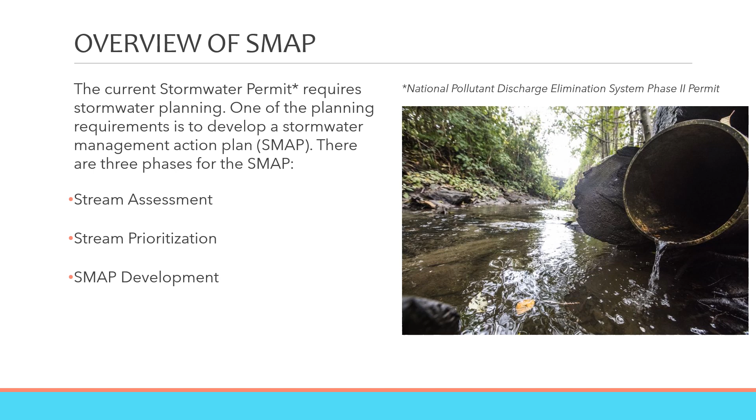3 steps are required to complete an SMAP: a citywide stream assessment, a stream prioritization, and development of a plan for the prioritized stream. With your help, we have selected Miller Creek for Burien's SMAP with a focus on the downtown subbasin. We have developed stormwater solutions that can improve the water quality in Miller Creek, which we will go over in this video. More information on this project can be found on the city's website.

The Burien Stream Assessment was completed in March 2022. 3 watersheds were brought to the public for prioritization: Miller Creek, Walker Creek, and Salmon Creek. Miller Creek was prioritized in June 2022, and stormwater solutions were developed and ranked by the public in August 2022. At this point, we have developed the stormwater solutions and are bringing them to you for review. We will incorporate your feedback into the final SMAP, which will be completed by March of this year.

Why did we choose to focus on our downtown? This subbasin is very urbanized, so it has large amounts of hard land cover, heavily used streets, and both commercial and multifamily residential properties. Also, a lot of this urbanization occurred before current stormwater regulations, which means that there has been limited stormwater management in this area. This has likely contributed to the water quality problems in Miller Creek. Burien's SMAP is being developed to help address these issues.

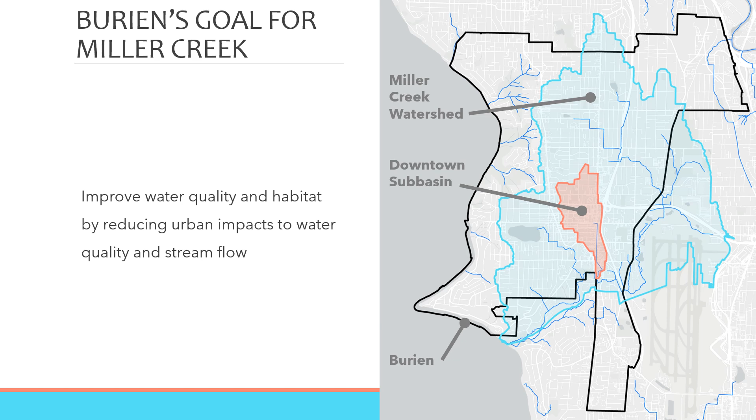The next step to address these issues was to develop stormwater solutions. Solutions can be programs that change the way land or stormwater is managed, or stormwater retrofits, which are construction projects that address impacts from existing development. We proposed 9 solution types for our downtown area that were brought to stakeholders for input, including you.

One way we solicited input was through an online survey. The survey showed that residents supported vegetated solutions and public-private partnerships. Your input, along with technical feasibility, timing, and funding availability, helped to determine which solutions we move forward with. The final 7 solutions will all be presented in this video.

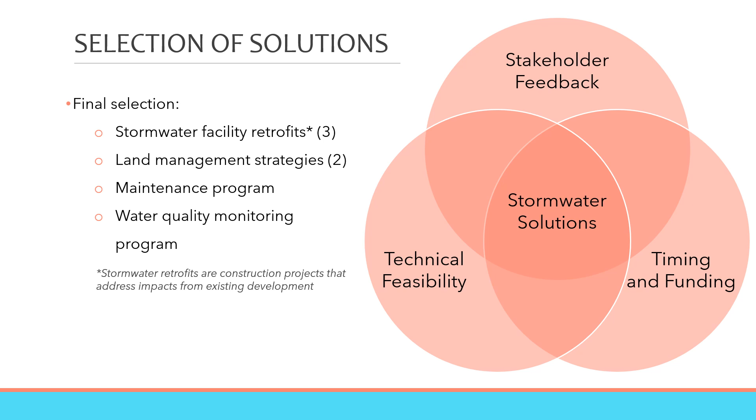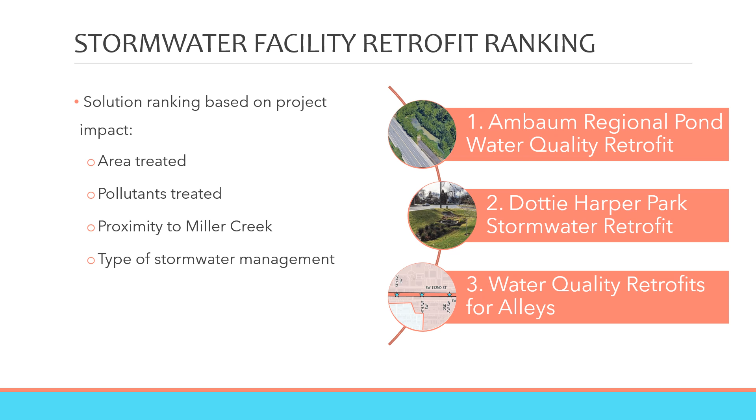Next, we will discuss the ranking system that was developed for the retrofit solutions to prioritize their implementation. 3 retrofit projects were ranked based on the area and pollutants they would treat, how close they would be to Miller Creek, and the type of stormwater management the project would provide. Overall, the projects that had a greater benefit to Miller Creek were ranked higher. The final ranking can be seen on the right.

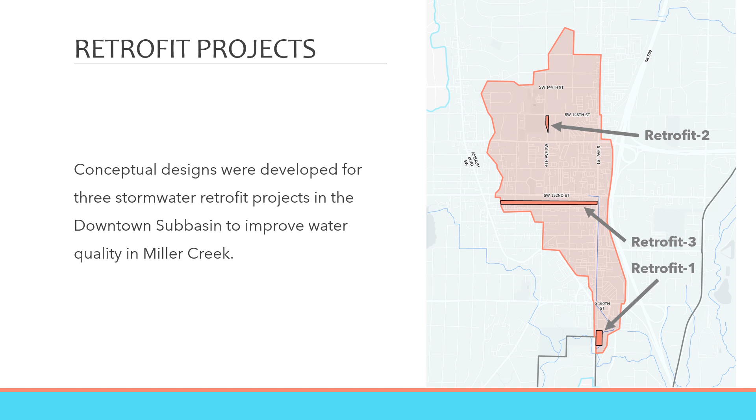The entire downtown basin, which includes several high-use roadways, drains to Ambaum Pond with limited treatment. The pond then drains into Miller Creek. Let me give you a little background about this facility. The pond was built in 1990 to provide detention, and then expanded in 2006 to reduce upstream flooding and provide some water quality treatment. A 2015 study found that this pond is very undersized for the stormwater that drains to it. Further, stagnant milky water has been observed in the pond for extended periods of time, which is evidence of poor water quality.

The retrofit project will allow the pond to drain between storms and provide enhanced water quality treatment for polluted runoff from the downtown neighborhood. This will reduce urban impacts to stream flow and water quality. Improving the function of this pond will help improve water quality for the entire downtown subbasin.

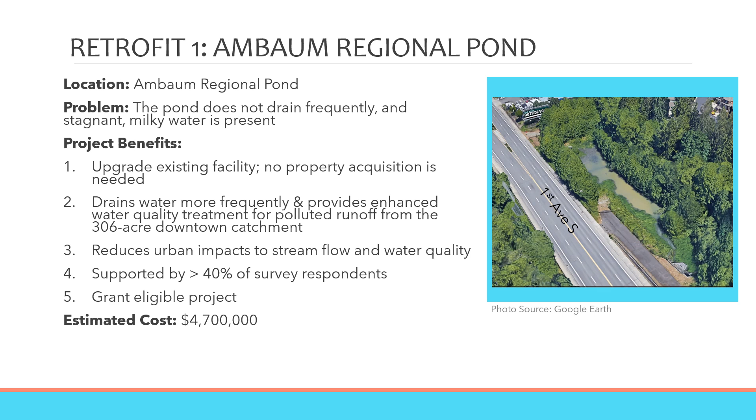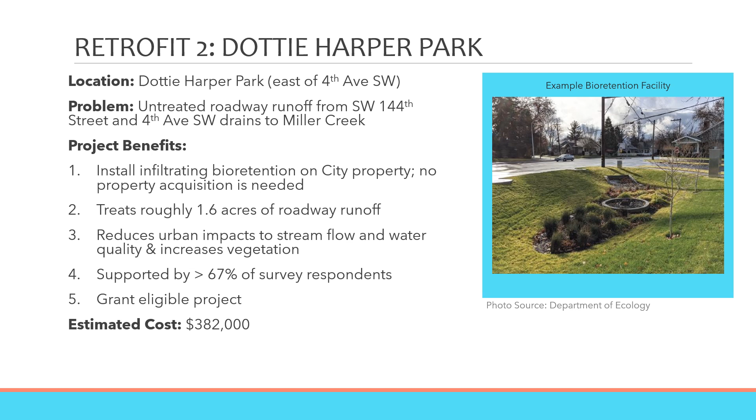This project will install an infiltrating bioretention facility in the northeast portion of Dottie Harper Park. The facility will treat stormwater runoff from Southwest 144th Street and 4th Avenue Southwest, which will help manage existing untreated runoff. Because the facility will infiltrate, it will help reduce urban impacts to stream flow and reduce the temperature of runoff reaching Miller Creek. It will also add more vegetation to the downtown subbasin.

The downtown alleys face several challenges. The alleys and adjacent parking lots are heavily used by both residents and businesses, and the stormwater runoff from these areas is untreated. This project will install 4 underground water quality facilities to treat runoff from the alleys between Southwest 152nd and Southwest 153rd Street. Further, there may be opportunities to collaborate with adjacent businesses to provide treatment for their parking lots.

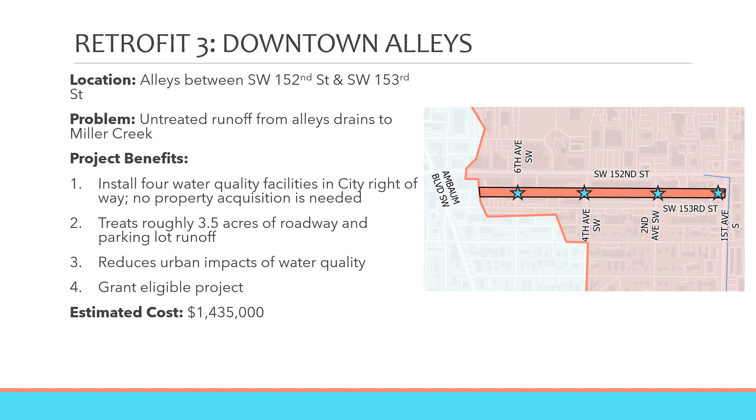Now that we've reviewed the retrofit projects, let's talk about the programs. The Green Stormwater Infrastructure Program is an existing program in the city's code and is being highlighted by the SMAP to encourage greater use. The program incentivizes private property owners to install bioretention facilities, tree planters, or other vegetated stormwater facilities. This program aims to reduce the amount of hard surface on private property, improve water quality, and increase green space in the downtown area. Depending on the type of facility installed, urban impacts to stream flow may also be reduced.

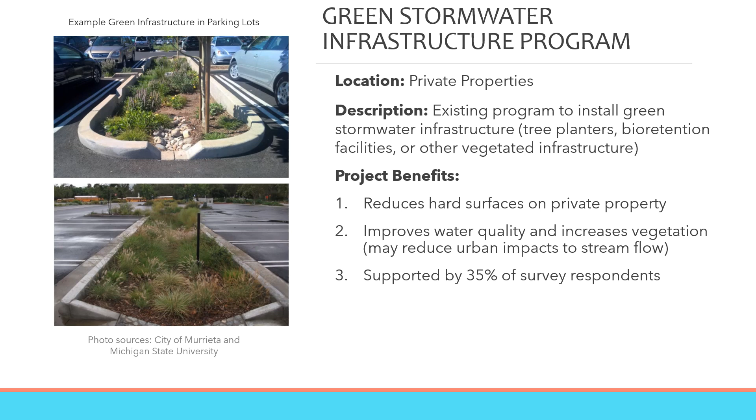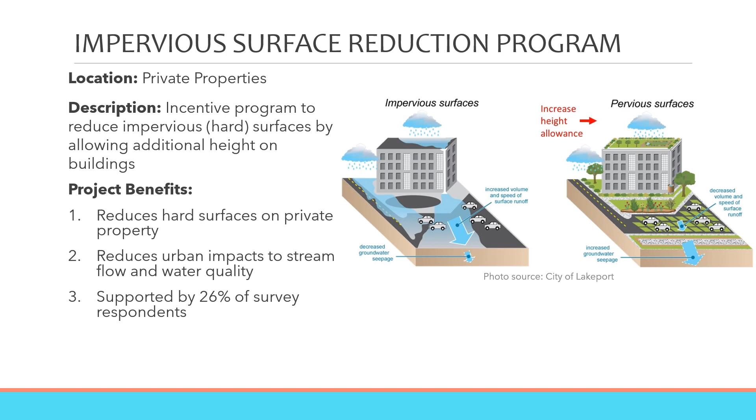The Impervious Surface Reduction Program would build on the city's public benefit incentive system. The incentive system allows development to increase building height by providing public benefits and is currently only offered in a small part of our downtown. The SMAP recommends increasing the eligible area to include 1st Avenue South. The SMAP also recommends reevaluating the incentive system to include stormwater facilities as a public benefit. Similar to the previous program, this would also reduce the amount of hard surface on private property and reduce urban impacts to stream flow and water quality in the downtown.

Now that we've discussed projects and land management programs, we'd like to shift gears to maintenance. Maintenance is a key factor in ensuring the long-term functionality and efficiency of the stormwater system. This in turn impacts water quality. As more stormwater facilities are installed, like those discussed earlier, maintenance needs will increase.

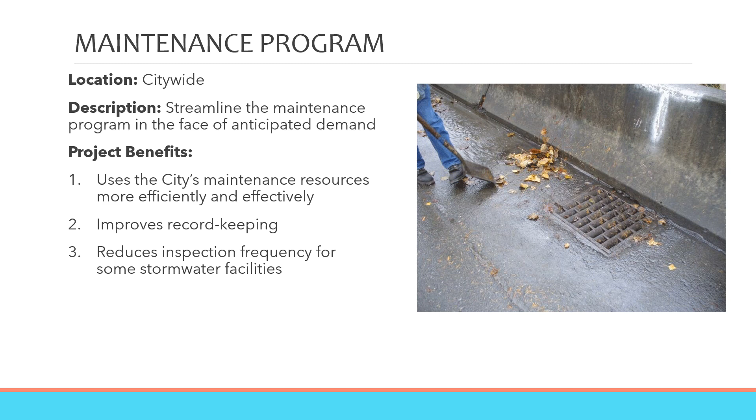So, what did we do? We assessed the city's maintenance program and came up with a series of recommendations. These recommendations, if implemented, will use the city's existing resources more effectively. This would include an asset management approach to maintenance, different data management practices, and more.

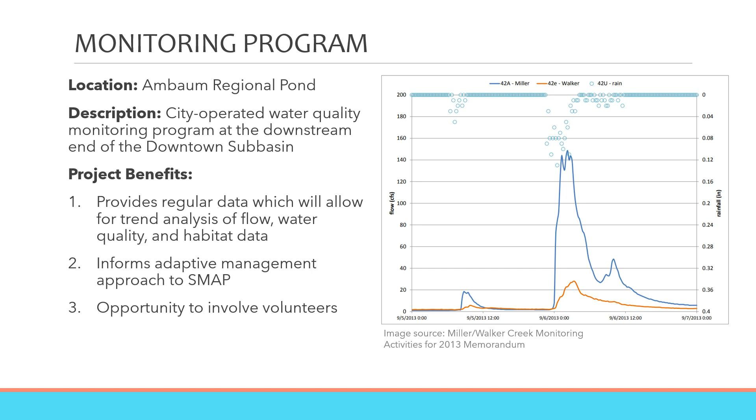Now let's imagine all the projects and programs we've discussed so far have been implemented. How do we measure if these have truly improved water quality in Miller Creek? We do that by monitoring. The SMAP recommends a monitoring station at the outlet of the Ambaum Regional Pond. This monitoring station would measure both flows and water quality. Over time, we will have collected enough data to inform future decisions about stormwater management. One added benefit of this program is that it provides opportunity to partner with the Miller Walker Stewardship Group as well as volunteers. Now let's talk about implementation.

The SMAP will be implemented over a period of 20 years, broken into a short-term phase and a long-term phase. As we transition into the long-term phase, adaptive management will play a key role. So what is adaptive management? Adaptive management is the implementation of a management strategy, closely monitoring its effects, and then adapting future actions based on the observed results. It allows us to alter our approach to stormwater management as we get new information, such as monitoring data and advances in science. Adaptive management would allow the city to have a nimble response to new information, changing technologies, community goals, and so on. It would also lead to a more efficient use of resources over the long term.

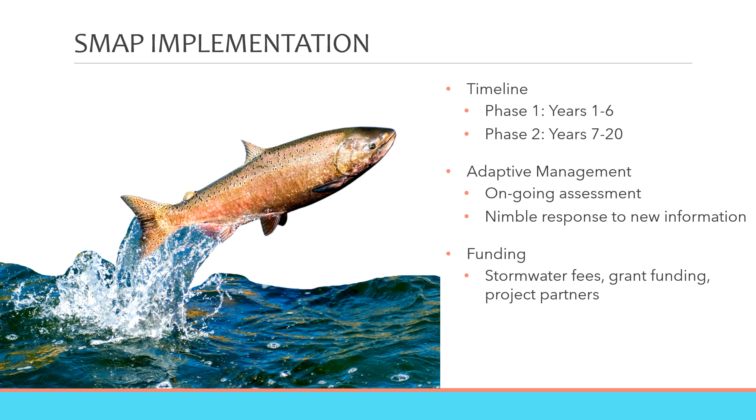Identifying sources of funding is equally important for implementing the SMAP. Solutions can be implemented using the city's existing stormwater fees, project partners, and grant funding, which is available through federal, state, regional, and local sources.

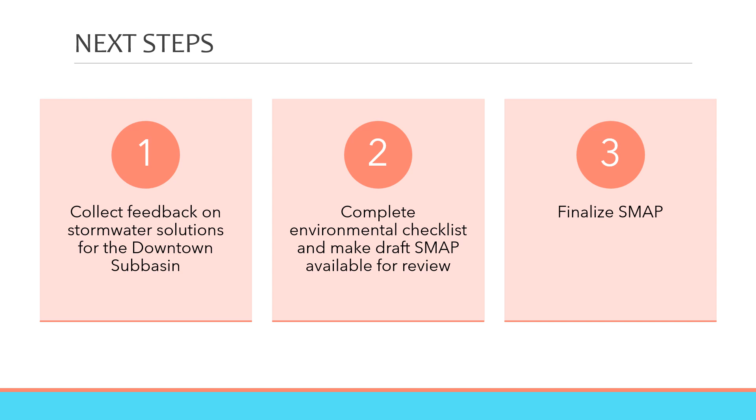The next step for this project is collecting feedback on the stormwater solutions presented in the video. Next, we will finalize an environmental checklist and develop the draft SMAP document. The draft document will be posted for review on the city's website in February. The final SMAP document will be completed by the end of March this year.